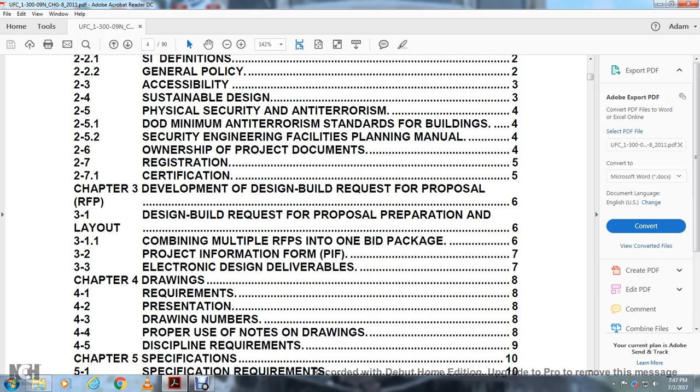Chapter 4: Drawing requirements - Presentation, drawing numbers, proper use of notes on drawings, discipline requirements.

Chapter 5: Specifications - Specification requirements guide specifications, Unified Facility Guide Specifications, regional guide specifications, other guide specifications, performance technical specifications, unified guides.

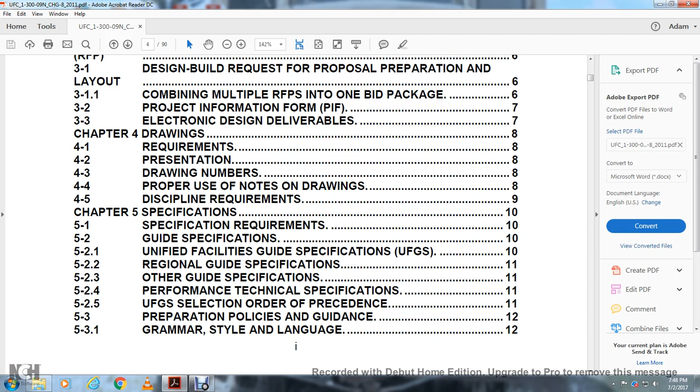UFGS selection and order of precedence, preparation policies and guidance, grammar, style, language, project specifications, standard plate sketches and details, proprietary specifications, or-equal specifications, experience clauses, warning clauses, unrestricted bidding, contract parties, contract clauses, contract directions, specifying new items, coordination.

Specific drawing precedents, coordination, SpecsIntact, use of MasterFormat, organization of information, overall specification organization, bidding requirements and contract requirements, project information form format, general requirements, Division 00 and 01 specification sections, environmental requirements, asbestos, lead-containing paint, PCBs, hazardous material, combining projects in one bid package.

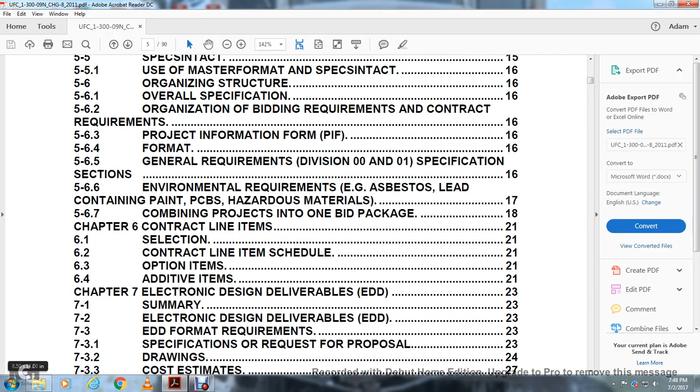Chapter 6: Contract Line Item Selection - Contract Line Item Schedule, option items, additive items.

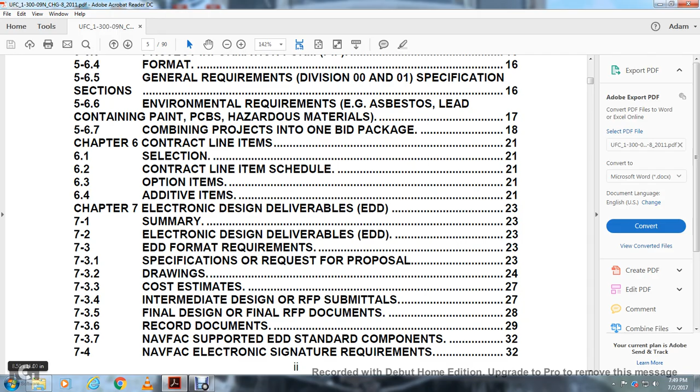Chapter 7: Electronic Design Deliverables Summary - Electronic Design Deliverables, EDD format, requirement specifications, request for proposal, drawings, cost estimate, intermediate design request for proposal submittals, final design, final request for proposal documents, record documentation, NAVFAC-supported EDD standard components.

NAVFAC electronic signature requirements - general requirements, specific software requirements, wet-sign design document signature requirements for design-build, media organization, general and final submittal requirements, minimum record drawing submittal requirements.

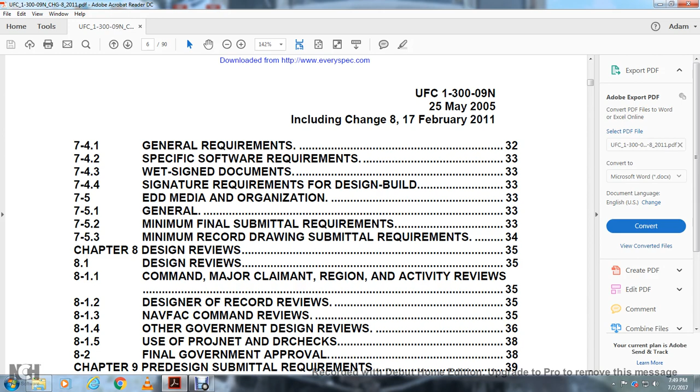Chapter 8: Design Reviews - design reviews, major command region activity reviews, designer of record reviews, NAVFAC command reviews, other government design reviews, use of ProjNet and DrChecks, final government approval.

Chapter 9: Pre-design submittal requirements - cost requirements, DD 1391, furniture fixtures and equipment, engineering studies, solar analysis, engineering analysis, environmental requirements, field investigation, life safety code, surveys, pavement evaluation, topographical survey, geotechnical investigation report, requirements and management plan (RAMP).

Chapter 10: Design submittal requirements - general requirements, discipline-specific guidance, number of copies, responding to review comments, cost estimate, basic design calculations, drawings, specifications, request for proposal, furniture fixtures and equipment, critical path submittals, concept design submittal, basis of design.

Drawing calculations, charettes, functional analysis, concept development studies.

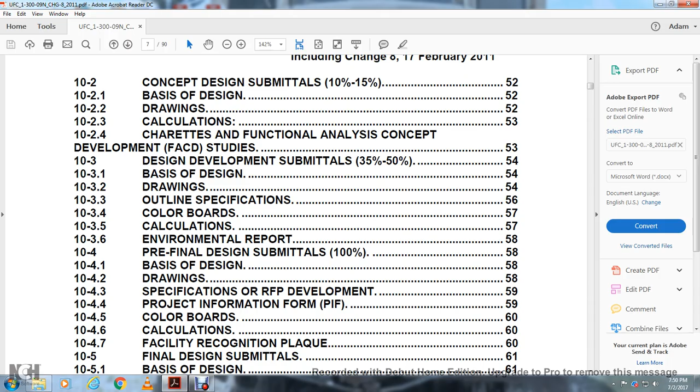Design development submittal at 35 to 50% - basis of design, drawings, outline specifications, color boards, calculations, environmental report, pre-final design submittal, basis of design, drawings, specifications, request for proposal, project information form.

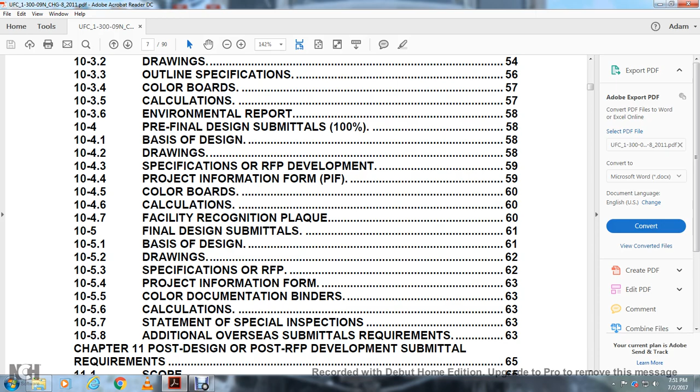Color boards, calculations, facility recognition plaque, final design submittal, basis of design, drawings, specifications for request for proposal, project information form, color documentation binders, regulation statement of special inspections, additional overseas submittal requirements.

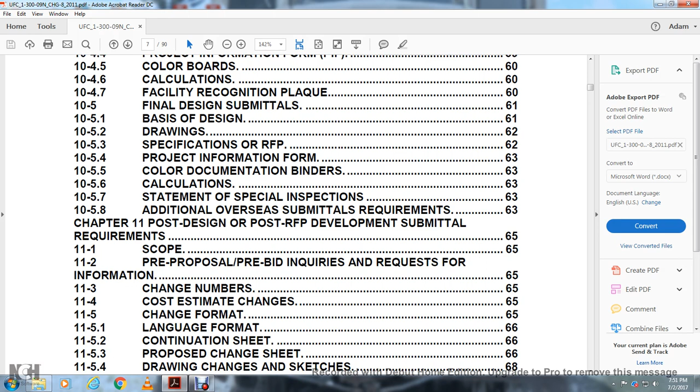Chapter 11: Post-design, post-request for proposal development submittal requirements - scope, pre-proposal, pre-bid inquiry with request for information, change numbers, cost estimate, change format, language format, continuation sheet, proposed change sheet, drawing changes and sketches.

Chapter 12: Post-construction documentation - project closeout, record design. Glossary A, appendix references, Appendix B submittal resources. Table 1.1 specification request for proposal change format, Table 1.2 drawing change format, Figure 5.1 sample table of contents for combined projects, Figure 7.1 NAVFAC proof symbols, Figure 10.1 quality review block, Figure 11.1 sample amendment, Figure 11.2 sample contract modification.

Chapter 1, Introduction. Purpose and Scope. The UFC provides the policy statement for the design and development revision of project documents, including drawings, specifications, and requests for proposal for the facilities combined.

Cognizant of NAVFAC, the UFC has been developed to ensure consistency and clarity of project development, and forms the basic contract for the design and construction of facilities.

1.1 Organization of the Document. The document is organized by design policy, including policy with critical nature to design issues and documentation, design stages of pre-design and post-construction requirements, and design submittals that include each stage's exempt common requirements, applying to documents such as drawings and specifications which are provided in several design stages.

These common requirements are provided in separate chapters.

Applicability: The UFC applies to all NAVFAC projects and activities under contract that are preparing construction contract drawings, specifications, and requests for proposals for shore facilities. It is applicable for both design-bid-build and design-build projects. References: a list of all references used in the UFC is at Appendix A.

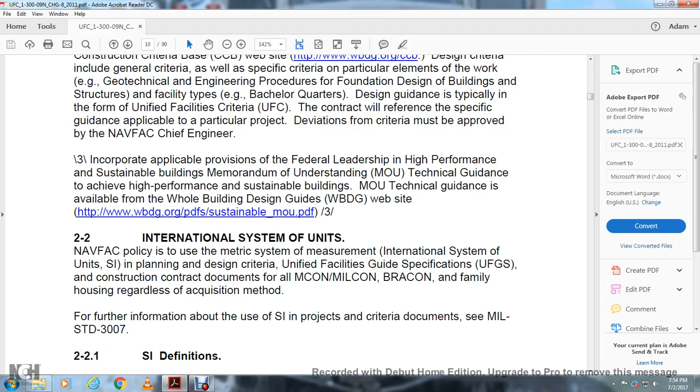International System of Units: NAVFAC policies on the metric system, the International System of Units (SI), apply to planning and design of Unified Facilities Guide Specifications (UFGS) and construction contract documents for MILCON, BRACON, and Family Housing, regardless of acquisition method. For further information on use of the system of units in projects and criteria documents, see MIL Standard 3007.

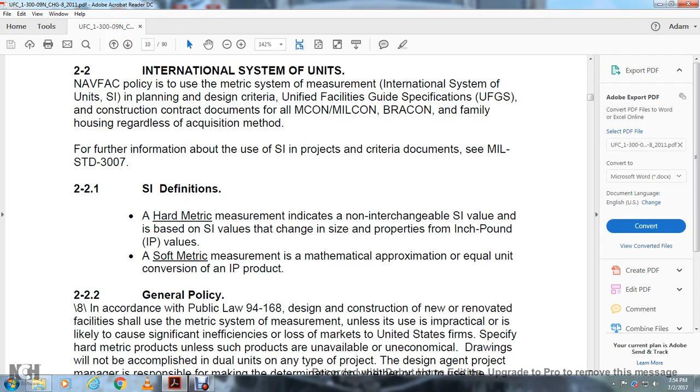Standard units definition: hard metric measurements indicate a non-interchangeable SI value, based on the SI value, with a change in size and properties from the inch-pound value. Soft metric measurements mean mathematical approximations equaling the conversion of the inch-pound (IP) product.

General policy: in accordance with Public Law 94-168, design and construction of new and renovated facilities shall use the metric system of measurement unless it is impractical and likely to cause significant loss of markets to United States firms, specify hard metric products unless such products are unavailable or uneconomical. Dual units will not be used on any project.

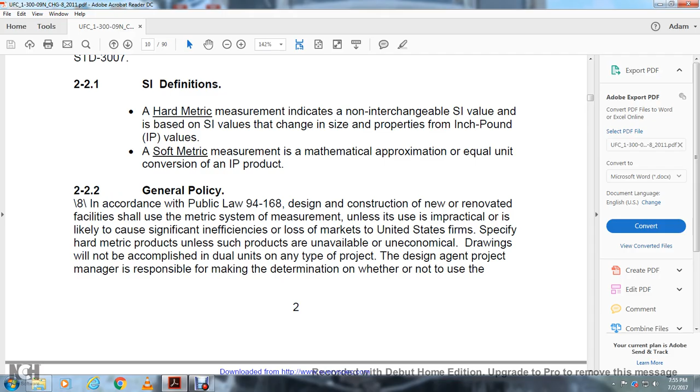Design agent project manager will be responsible for determining whether or not to use the metric system of measurement on a project-by-project basis. A determination not to use metric must be justified and documented in project files.

Accessibility: barrier-free design should be in accordance with the requirements of the DEPSECDEF Memorandum on Accessibility for People with Disabilities, dated October 31st, 2008. The memorandum updates the DoD standard for making facilities accessible to people with disabilities.

Sustainable design: following the requirements of NAVFAC Engineering Construction Bulletin 2008-01, Engineering Policy, and the Energy Policy Act of 2005, implementation of USGBC LEED certification.

NAVFAC policies reduce total ownership costs, including life cycle costs of shore facilities, by incorporating sustainable development principles and strategies into planning, programming, design, construction, operation, maintenance, sustainment, restoration, and modernization of all facilities infrastructure projects to the fullest extent possible, consistent with mission, budget, and client requirements.

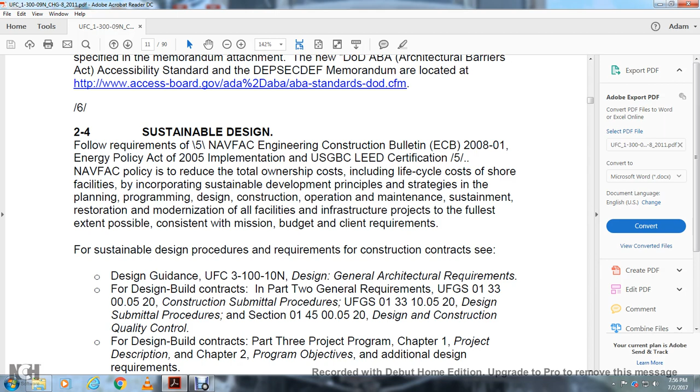For sustainable design procedure requirements of the construction contract, see the design guidance in UFC 3-100-10N and the general architectural requirements for design-build contracts, and general requirements in UFGS 0133000520 Construction Submittal Procedures, UFGS 0133100520 Design Submittal Procedures, and Section 0145000520 Design and Construction Quality Control for Design-Build Contracts, Part 3, Project Program.

Chapter 1, Project Description. Chapter 2, Project Objectives and Additional Design Requirements.

2.5 Physical Security and Anti-Terrorism. DoD Instruction 2000.16, DoD Antiterrorism Standards, and OPNAV Instruction 3300.53A, Navy Antiterrorism Program, establish policy for physical security and anti-terrorism design of inhabited buildings, to meet the requirements of UFC 4-010-01, DoD Minimum Antiterrorism Standards for Buildings, and UFC 4-010-02, DoD Minimum Antiterrorism Standoff Distances for Buildings, and Combatant Commander Antiterrorism Force Protection Construction Standards.

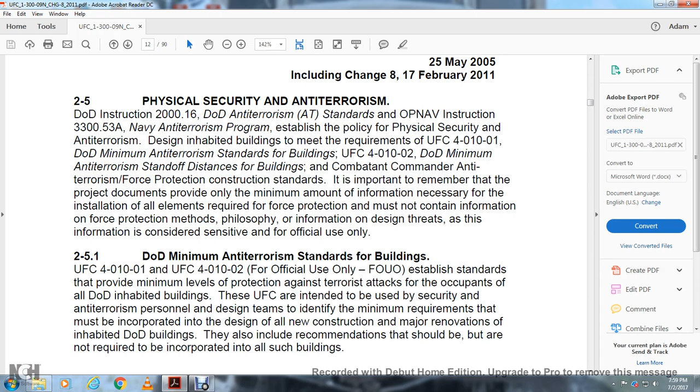The DoD minimum anti-terrorism standard for buildings, UFC 4-010-01 and UFC 4-010-02, is for use as the FOUO established standard to provide a minimum level of protection against terrorist attack for occupants of DoD inhabited buildings. The UFC is intended to be used by security and anti-terrorism personnel on the design team to identify the minimum requirements that must be incorporated into the design of all new construction and many major renovations of inhabited DoD buildings. It also includes recommendations that should be, but are not required to be, incorporated in all such buildings.

2-5.2 Security Engineering Facility Planning Manual. The UFC 4-020-01 Security Engineering Facility Planning Manual presents processes for developing design criteria necessary to incorporate security and anti-terrorism measures into DoD facilities, and for identifying the cost implications of applying these design criteria. Design criteria must be limited to the requirements of the minimum standards, which may include one of four issues described below.

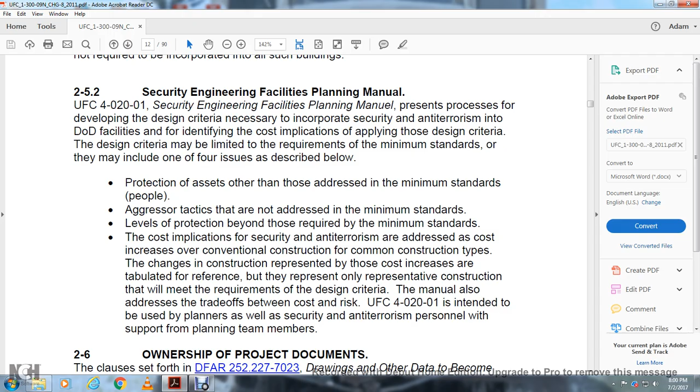The UFC 4-020-01 is intended to be used by planners as well as security and anti-terrorism personnel, with the support of other planning team members. 2.6 Ownership of the project documents.

Clauses set forth in DFARS 252.227-7023, drawings and other data become property of the government. DFARS 227.71 review rights of technical data, and DFARS 227.72 rights of computer software documentation, apply to all project design documentation.

2.7 Registration. Development of project documentation shall be under the direction of a registered architect or professional engineer currently licensed in accordance with FAR 52.236-25 requirements, for registration of the design and development of project documents under the direction of a registered architect or professional engineer currently licensed by the United States, a Commonwealth Territory, the District of Columbia, or by the foreign country in which the project is to be built.

Each drawing should be signed and sealed, dated by the registered architect or professional engineer who is registered in the practice of the particular field involved, for the work depicted on the drawing, serving as the designer of record for that work and complying with the requirements of FAR 52.236-26, signing record documents, in accordance with the electronic design deliverable requirements. Where special certifications are required for the design, certify in accordance with the contract or local requirements.

Chapter 3, Development of the Design Build Request for Proposal.

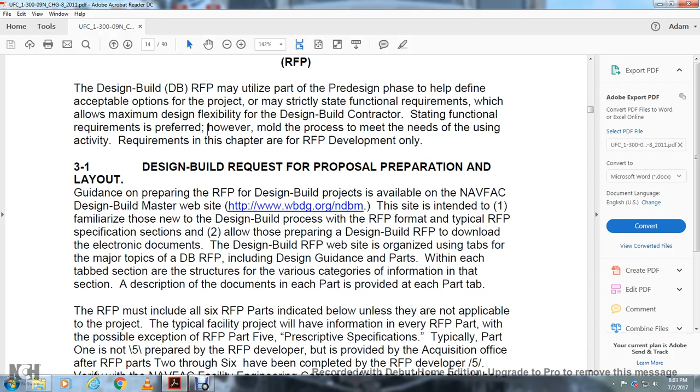The design build request for proposal website is organized using tabs for major topics, with a database of RFP and design build RFP documents, including design guidance. Parts within each tab's related section are structured for the various categories of information in that section. A description of the documents in each part is provided for each tab.

The request for proposal must include 6 RFP parts as indicated below, unless noted as non-applicable to the DB project. The typical facility project will have information in every RFP part, with the possible exception of RFP Part 5, Prescriptive Specifications. Typically, Part 1 is not prepared by the RFP developer; it is provided by the acquisition office.

RFP Parts 2 through 6 are to be completed by the RFP developer; verify with NAVFAC Engineering Command. The applicable tabs should be provided with the RFP for Part 1.

Part 1 includes proposal form documentation specifying the contractual requirements. Part 2 contains the general requirements specification section, some only available on design build websites. Part 3 contains the project program for the project. Part 4 contains the performance technical specification. Part 5 contains the prescriptive specification required for the design build RFP. Part 6 is attachments: boring logs, references, drawings.

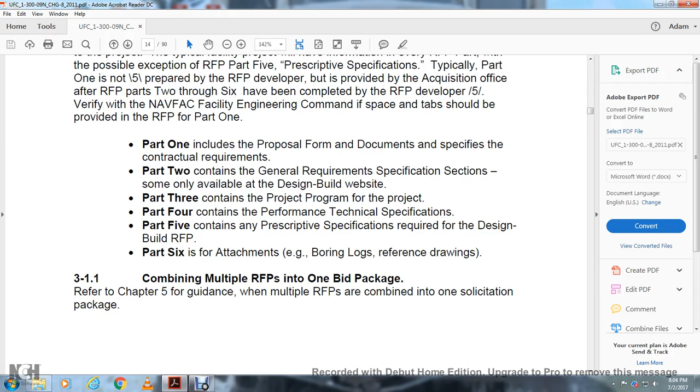3.1.1 Combining multiple requests for proposals into one package. Refer to Chapter 5 of the guidance for the request for proposal regarding multiple RFPs combined into one solicitation package.

Electronic design deliverables provide request for proposal electronically in accordance with Chapter 7, electronic design deliverables, organizing the request for proposal into 1 or 2 PDF files in order to show the table of contents, bookmarked, each of the items below and additional items are located.

Request for proposal cover sheet, Part 1 divider when directed by the command. Overall request for proposal table of contents, Part 2, Part 2 divider and Part 2 table of contents. Part 2 specification section bookmark the first page of each section. Part 3 divider, Part 3 project program cover sheet, Part 3 table of contents, Part 3 project program.

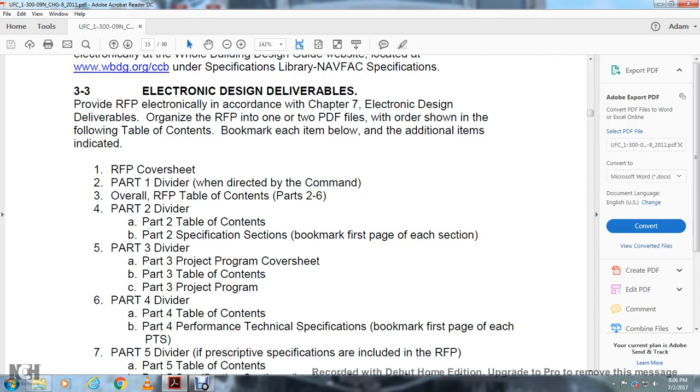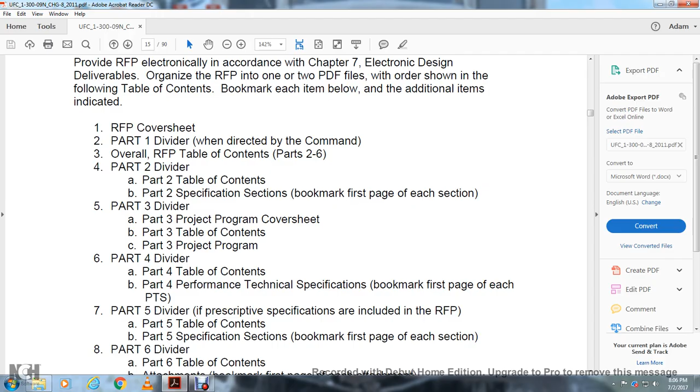Part 4, Part 4 table of contents, Part 4 performance technical specification, bookmark first page of each of the PTS or performance technical specifications. Part 5 divider if prescriptive specifications include the request for proposal. Part 5 table of contents, Part 5 specification section, bookmark the first page of each section. Part 6 divider, Part 6 table of contents, attachment, bookmark first page of each attachment.

Chapter 4, Drawings. Requirements. Prepare the drawings in accordance with Chapter 7, electronic design deliverables, as required herein. The drawings presented shall be consistent with the presentation format of one of the disciplines. Show the material selection directly on the detail.

Other disciplines should conform to that format. Do not use numbers to refer to a numerical legend elsewhere on the drawings. Drawing numbers: request the NavFac drawing numbers from the government project manager or the design manager.

Provide them with the following information: the amount of numbers required for each project, Maximo work order number, the project title, and request enough numbers, usually 10% or more. Additional sheets can be added if necessary, properly, or use the notes on the drawing.

Be consistent with the grammar used in the notes on the drawing. Whenever possible, use imperative statements to describe work accomplished by the contractor. For example, instead of using 'contractor shall provide,' use 'provide' - it is understood the notes are written with the contractor's action in mind.

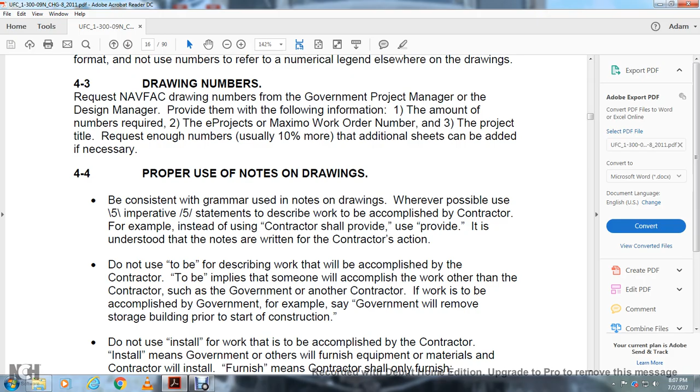Do not use 'to be' for describing work that will be accomplished by the contractor. 'To be' implies that someone other than the contractor is accomplishing the work, such as the government or another contractor. If the work is to be accomplished by the government, for example, say 'government will remove storage building prior to starting construction.'

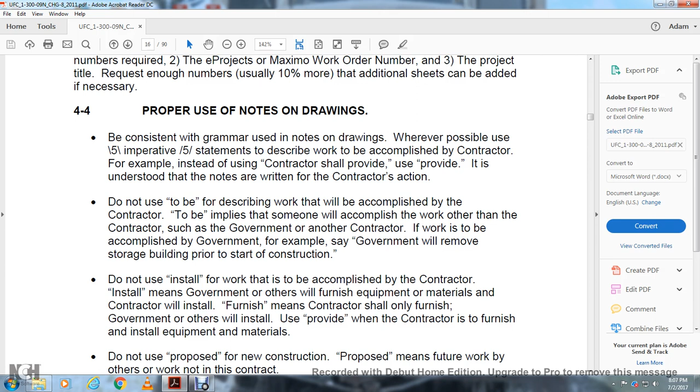Do not use 'install' for work to be accomplished by a contractor. 'Install' means government or other furnished equipment and materials, and contractor will install. 'Furnish' means the contractor shall only furnish, the government or others will install. Use 'provide' when the contractor is to furnish and install the equipment or materials.

Do not use 'proposed' for new construction. 'Proposed' means future work, or means work not in this contract. Do not use 'new' for work in the contract. All work shown on the drawings is considered new unless indicated otherwise. Inconsistent use of 'new' throughout the drawings could imply that only some of the work is required.

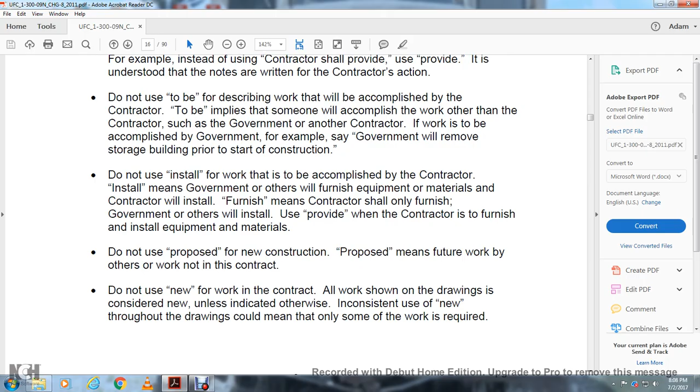Do not use ambiguous statements that can't be enforced by the inspector during construction. For example, 'grade to drain' or 'hand excavate carefully, provide the materials in good condition.' Be careful with statements like 'remove and replace,' which means to remove the old item or material and replace that item or material when the work is completed.

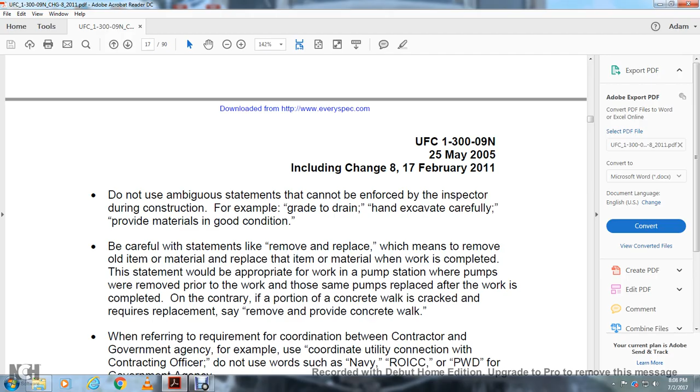This statement would be appropriate for work on a pump station, where the pumps were removed prior to the work, thus the same pumps are replaced after the work is completed. On the contrary, if a portion of the concrete walk is cracked and requires replacement, say 'remove and provide concrete walk.'

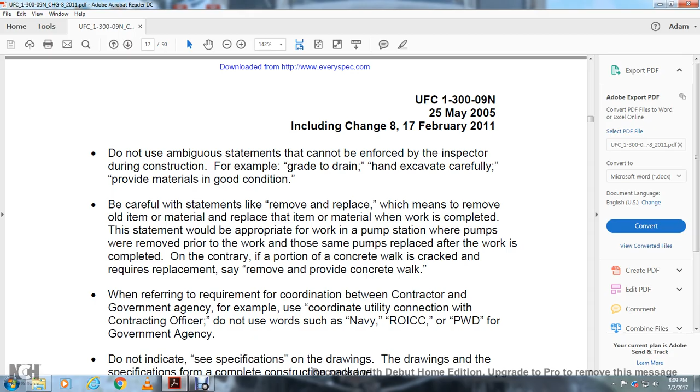When referring to a requirement of coordination between contractor and government agency, for example, 'coordinate utility connection with the contracting officer,' do not use words such as Navy, ROICC, or Public Works (PWD) for the government agency. Do not indicate specifications on the drawing - the drawing and specifications form a complete construction package.

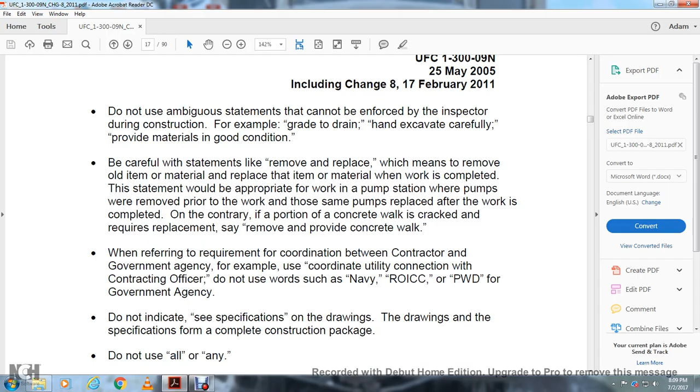Do not use 'all' or 'any.' Do not use words that have multiple meanings but require opinions or judgmental decisions, such as timely, nearly, good condition, suitable, well balanced, suitable for intended use, reasonable, approximate, reliable, proper, usable, appropriate, adequate, or qualified.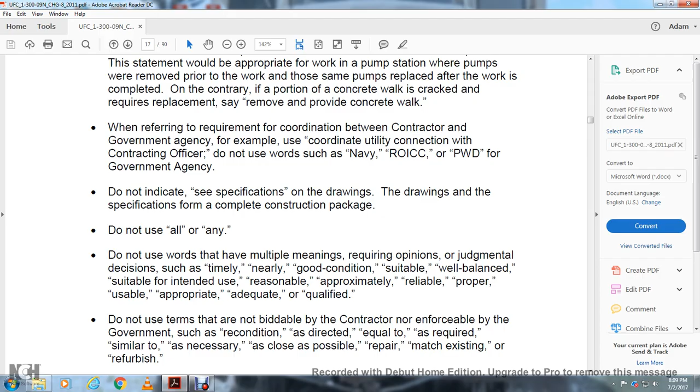Do not use words that are not biddable by the contractor nor enforceable by the government, such as recondition, as directed, as equal to, as required, similar, as necessary, as close to as possible, repair, match existing, or refurbish. Some terms are only enforceable if the quantities are shown in the drawings, included in the specifications such as indicated, shown, specified herein, and as noted.

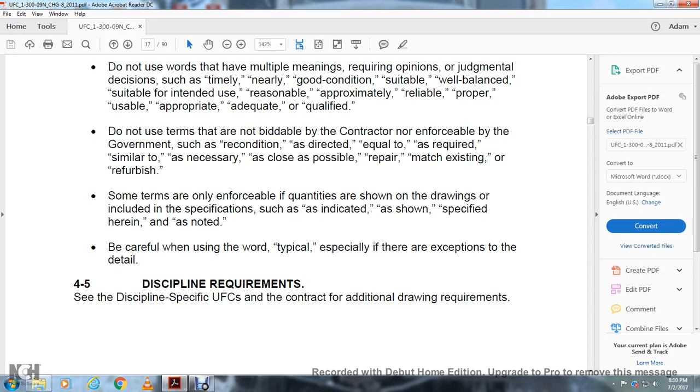Be careful when using the word 'typical,' especially if there's an exception to the detail. 4-5 discipline requirements: see the discipline specifics of the Unified Facility Criteria and the contract for additional drawing requirements. Chapter 5, Specifications.